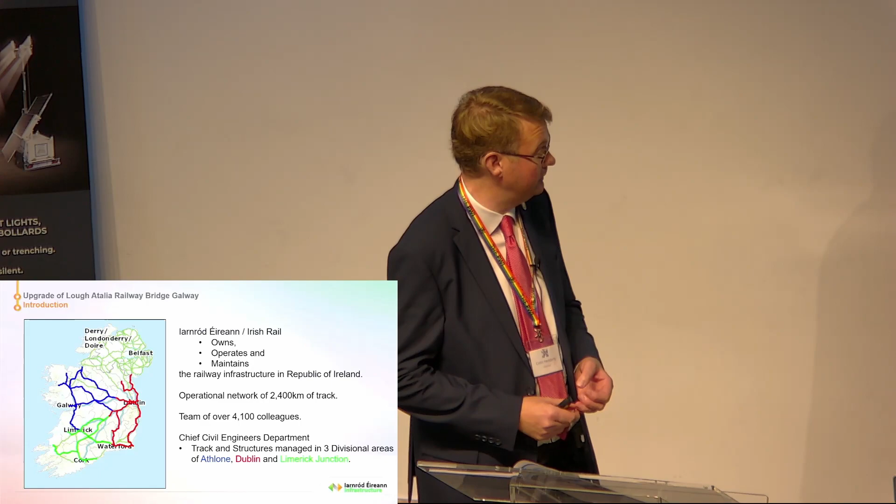I thought I'd just start with defining what I mean by sustainability. So what is sustainability? It's recognition that there are limits to the Earth's natural resources and its ability to withstand ever-increasing human impact. Sustainability is meeting the needs of the present generation without compromising those of future generations, or meeting human needs within ecological constraints. But beware, this is a word that's overused and often abused.

Now, building a sustainable future is a profoundly complex problem. And while there's no oven-ready solutions to these problems, there are better or worse approaches and decisions. And the bridge I'll talk to you about is an example of a better design choice.

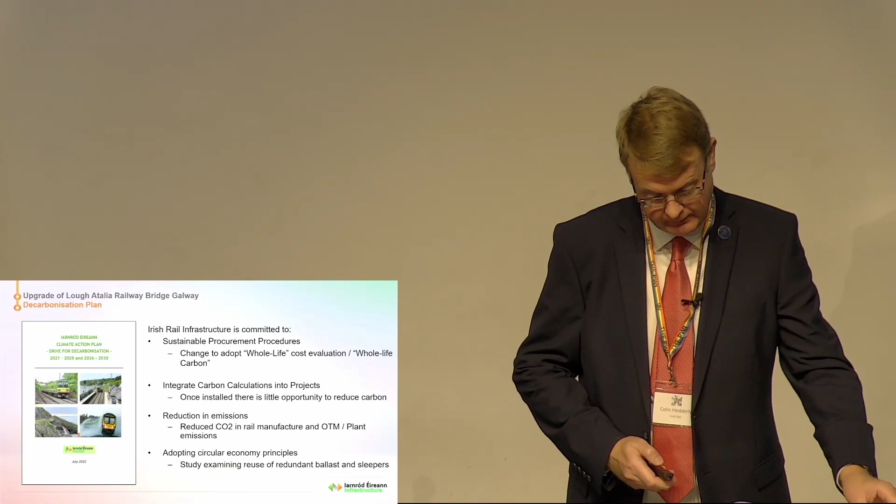We're also committed to adopting circular economy principles. We're examining options there for reuse of redundant ballast and sleepers.

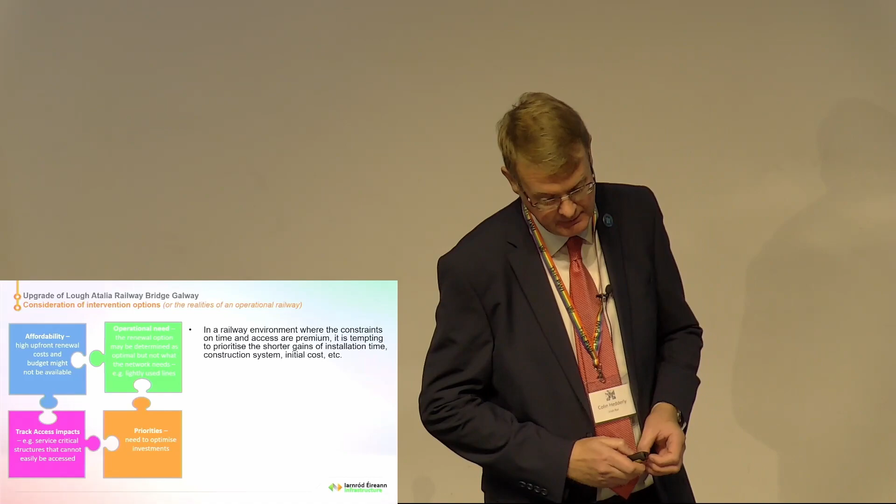Now, when we consider our options for intervention to an asset such as a bridge, in the real world of an operational railway, we have many factors to consider. Here I've highlighted 4: affordability, operational need, track access impacts, and the priorities. So in a railway environment where the constraints on time and access are at a premium, it is tempting to prioritise the shorter gains of installation time, construction system, and initial cost.

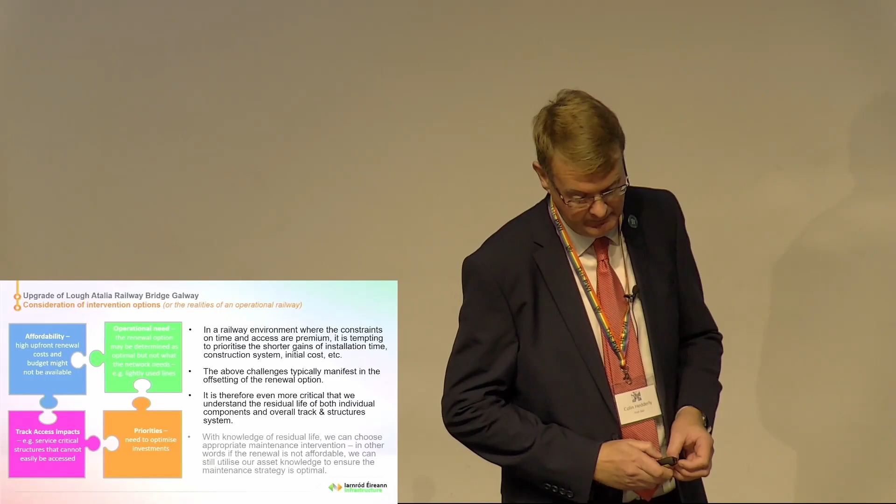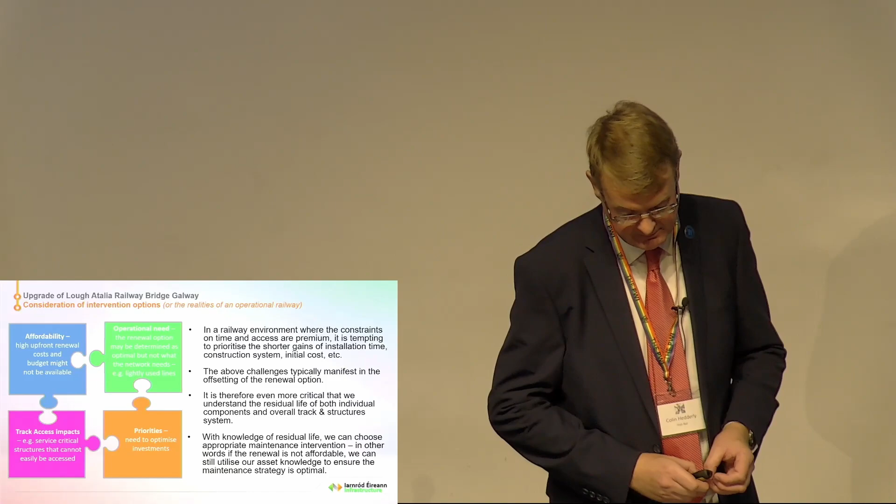And the above challenges typically manifest in the offsetting of the renewal option. It's therefore even more critical that we understand the residual life of both the individual components and overall track and structure system. With knowledge of residual life, we can choose appropriate maintenance interventions. In other words, if renewal is not affordable, we can still utilise our asset knowledge to ensure the maintenance strategy is optimal. So in summary, there are many factors that come into play in making a decision on the intervention option.

Now, after that brief introduction, I'm going to tell you about the project at Lough Atalia Bridge in Galway City. The project involves structural repair and upgrade of a heritage double-track bridge.

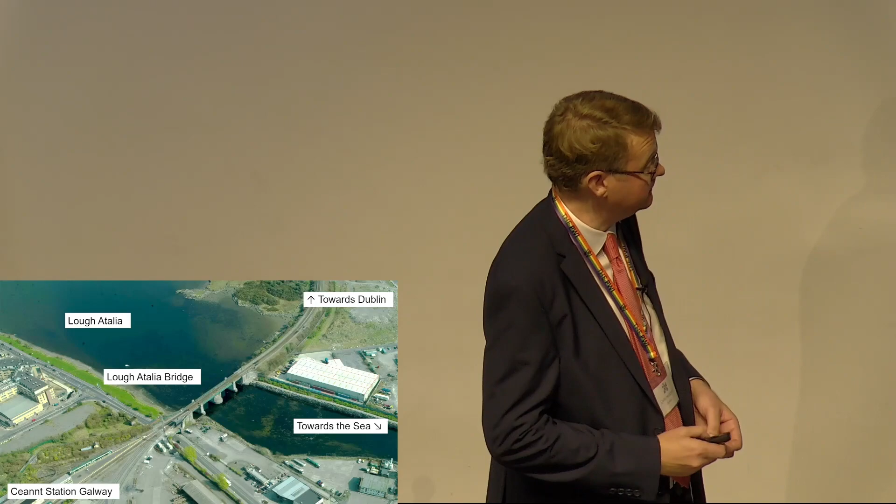Here we see an aerial photo of the bridge across Lough Atalia, which is a sea lough. Trains arriving into Galway sweep around a right-hand curve from the top right with a wonderful vista of the lough, and arrive into Ceannt Station, the terminal station, at the bottom left.

Now, until I started putting together this paper, I hadn't realised the history of the bridge and that it was groundbreaking in its time. I have a slide coming up on that later on. The eagle-eyed of you might have already questioned how come I can only see 4 spans, three piers. I have a slide that explains that now.

The reason being, originally the bridge rotated around an opening span on the central pier. From a structural point of view, we regard that 3rd span as being fully supported above the central pier. So hence the 5 spans.

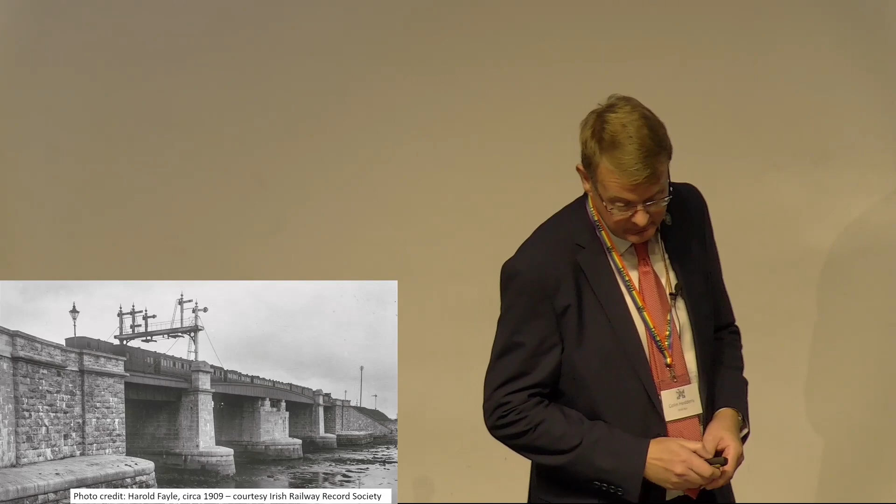The original swivel span of the bridge is recorded as being groundbreaking in its time, in that it was the longest swivel span in the world when constructed in 1851. The design was a patented box girder supplied by Sir William Fairbairn from his foundry in Manchester. Fairbairn is famous for developing the box girder for the Britannia Bridge, which spanned the Menai Straits on the rail line from Anglesey, North Wales, which opened in 1850, just a year before the Galway opening.

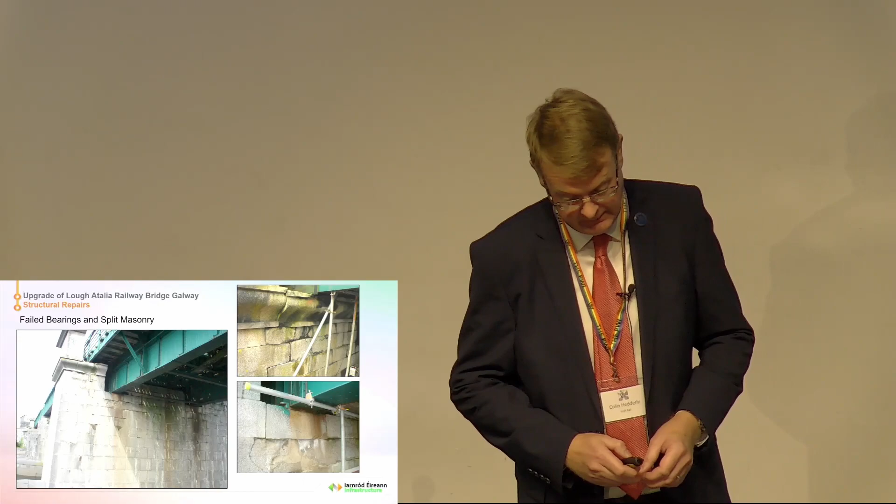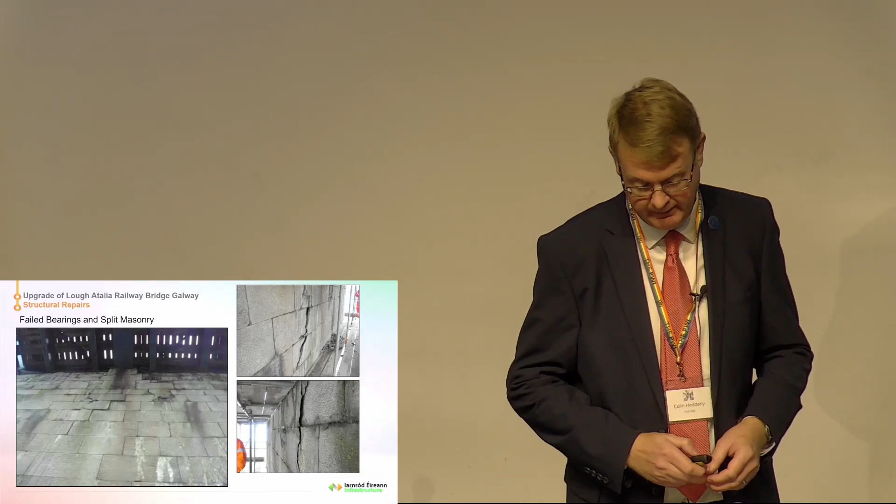The diagnosis was we had problems with the bearings, in that they were no longer working to allow longitudinal movement. Here again, the symptoms of the bearing problem can be seen on the central pier, with cracks running down 8 courses of stonework below the bearing.

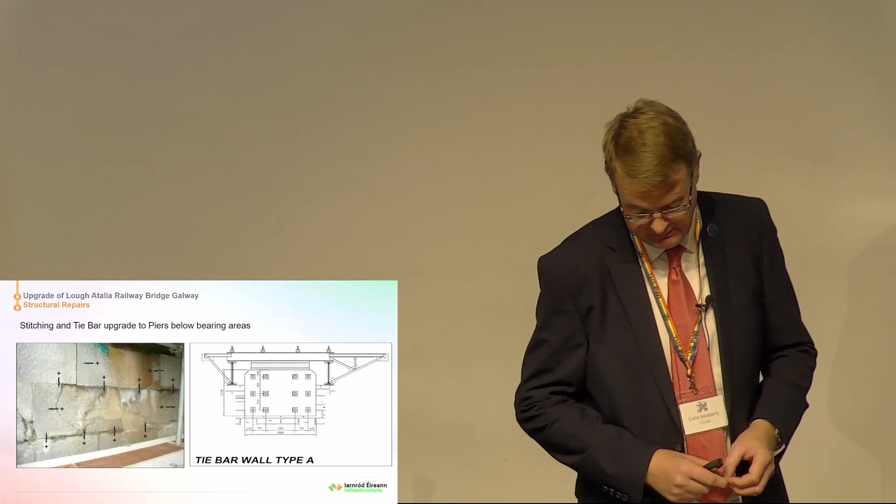Now, Lough Atalia Bridge has already experienced a long life, despite increasing demands being placed on it. With careful stewardship and correct interventions, the bridge can remain in service for many years in the future. And this, as we know, is a more sustainable approach, to prioritise refurbishment over new builds.

In the slide here, our structural department designed a remediation by way of stitching, tie bar enhancement to the areas below the bearings of the piers. The photo on the left indicates the placement of the stitching bars, and the sketch on the right is the tie bar anchors. These tie bars pass right through the pier, anchored in the same fashion on the far side of the pier.

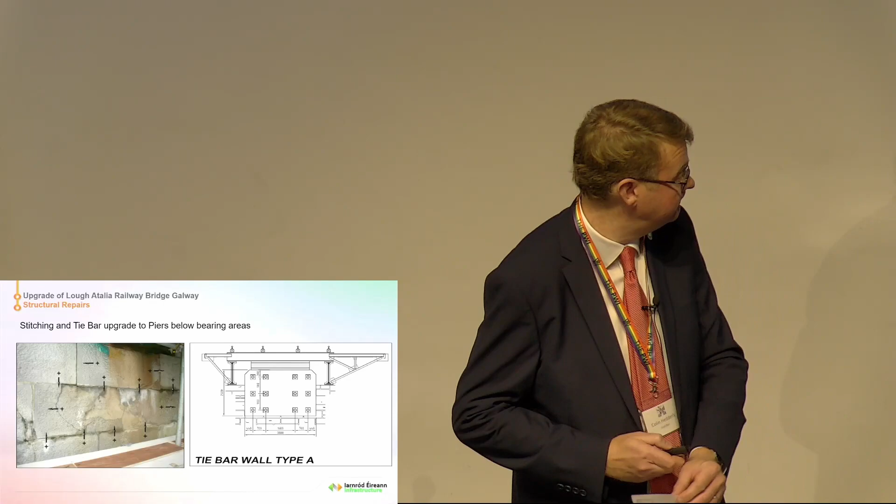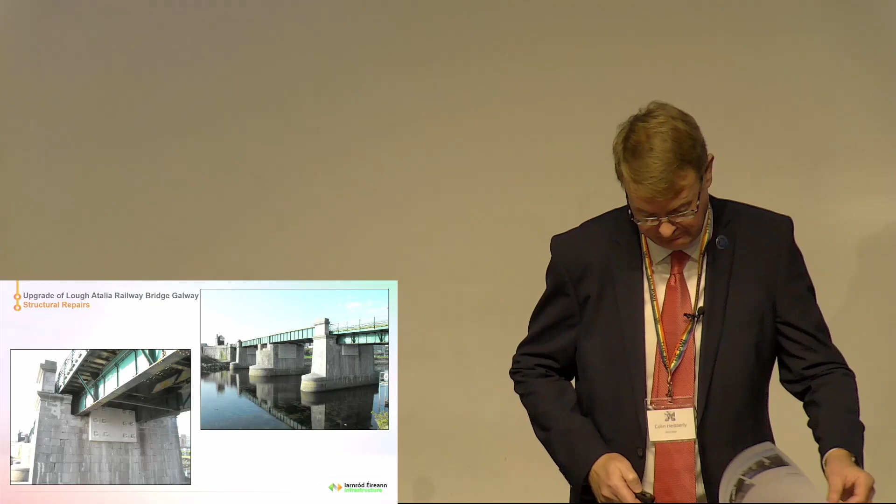We then addressed the failed bearings, and here are photos before and after replacement. We replaced 6 bearings in a 50-hour possession by jacking up the beams and replacing bearing plates. This was done in 2012.

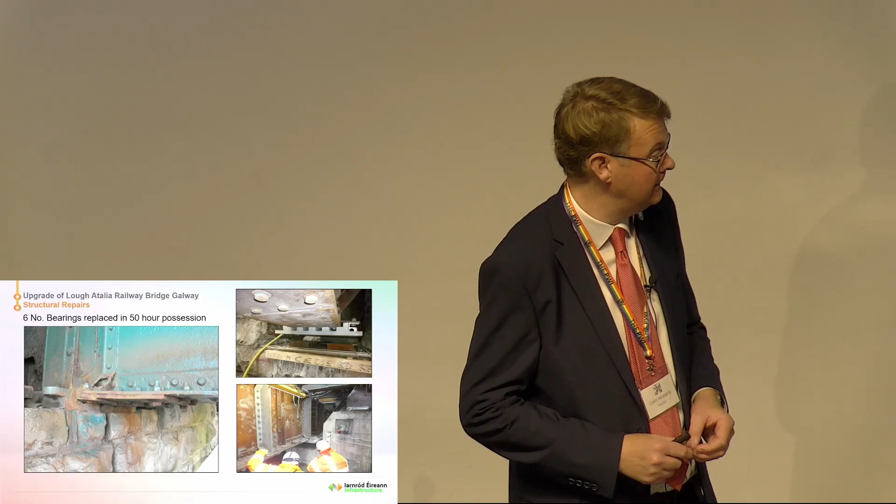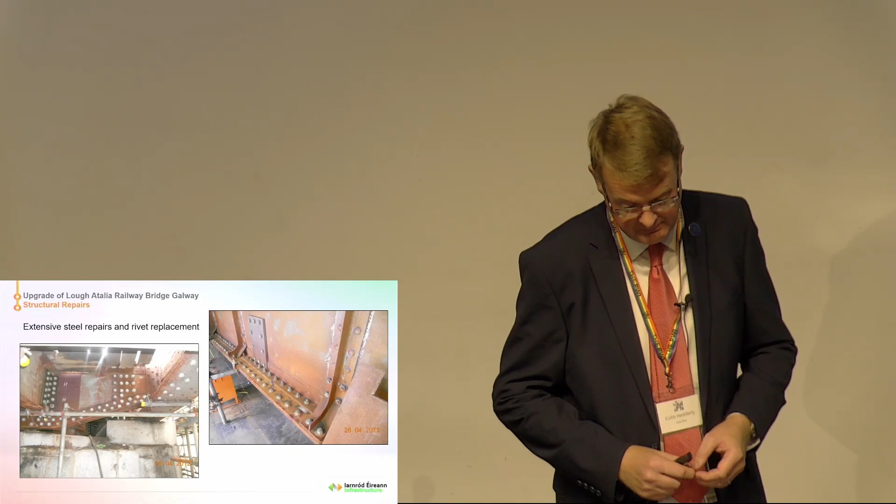Through 2012 and into 2013, our bridge gang went meticulously through the bridge from one end to the other, carrying out extensive repairs. Here's just a sample of the many photos illustrating rivet replacement, plating works, and stiffener repairs prior to painting.

The plan at the time was to complete steel repairs in 2013 and then finish the bridge with track renewal. This didn't happen. The track renewal was deferred in 2013 because the extent of the steel repairs and rivet replacement required exceeded the estimated budget, and the budget assigned to track renewal was diverted to finish the steel repairs.

The lesson here is you really don't know how bad something is until you've had a thorough look. Much of the bridge was difficult to access, so we estimated. When we shot blasted to clean down the metal surface in advance of repairs, it threw up a lot more work than we'd anticipated.

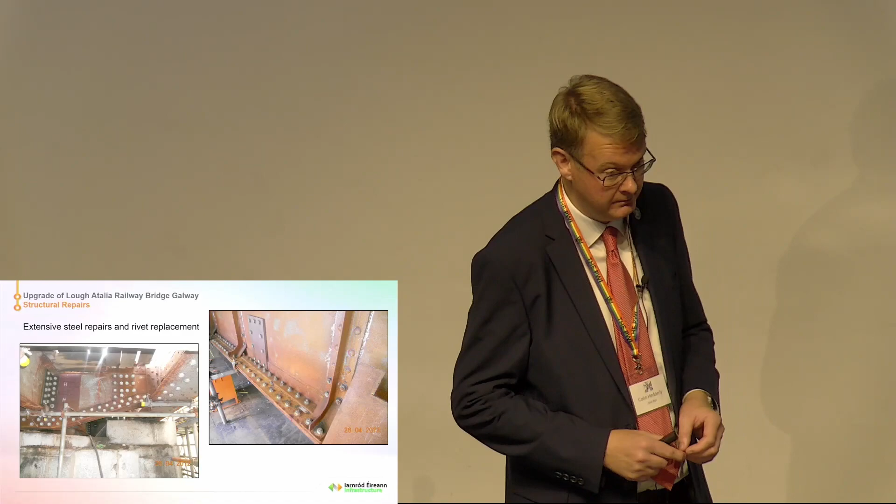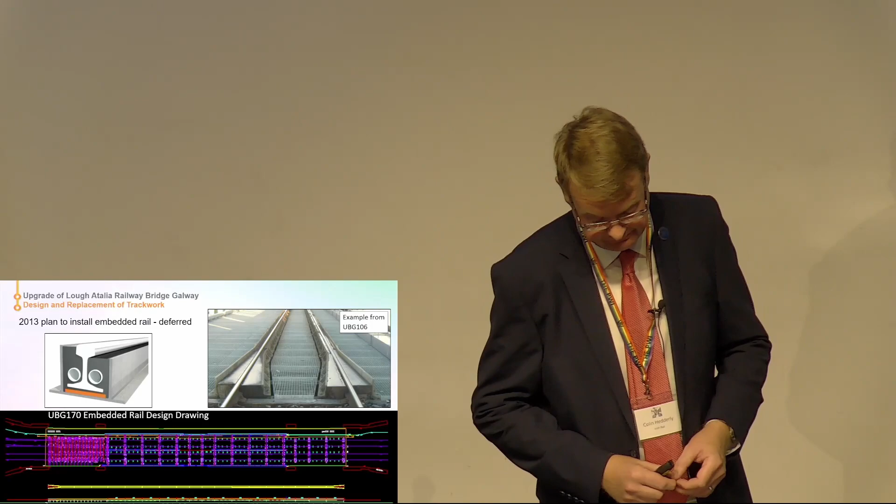Now in 2013, had the track renewal gone ahead, it would have been an embedded rail system like this. We'd have eliminated the timber way-beam for embedded rail. We've used this system widely on bridges across the Irish rail network, and it's considered a standard replacement for timber way-beam bridges, nicknamed silent bridges.

The deferral gave us an opportunity, though, to reconsider the track design. Although it was approved and already designed, at Lough Atalia, shown at the bottom of the slide, the embedded rail system would require extensive and costly conversion of the structure to carry the steel rail holder.

Whilst we might have come to consider embedded rails as a standard solution, there's nothing standard about our heritage bridges. I should add this is no reflection on the embedded rail system—it's a good system in our experience, absolutely. Once it's in place, it's fine; it's just that Lough Atalia needed major alteration works to accommodate the embedded rail.

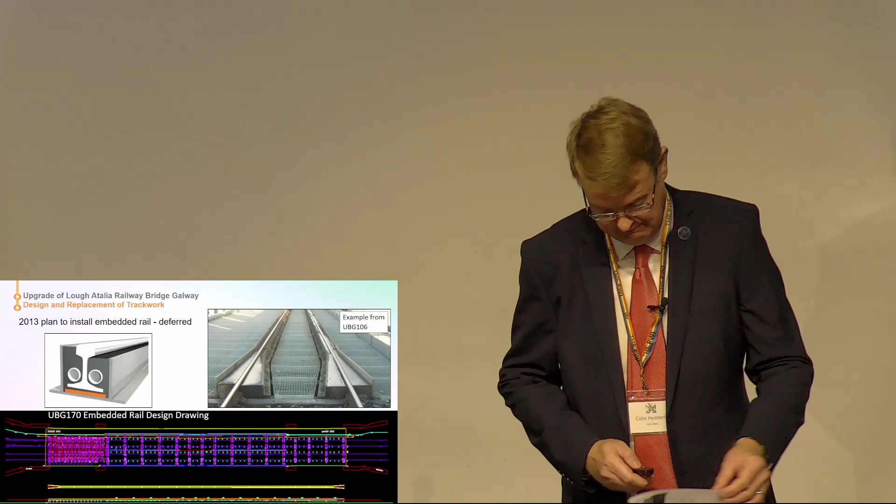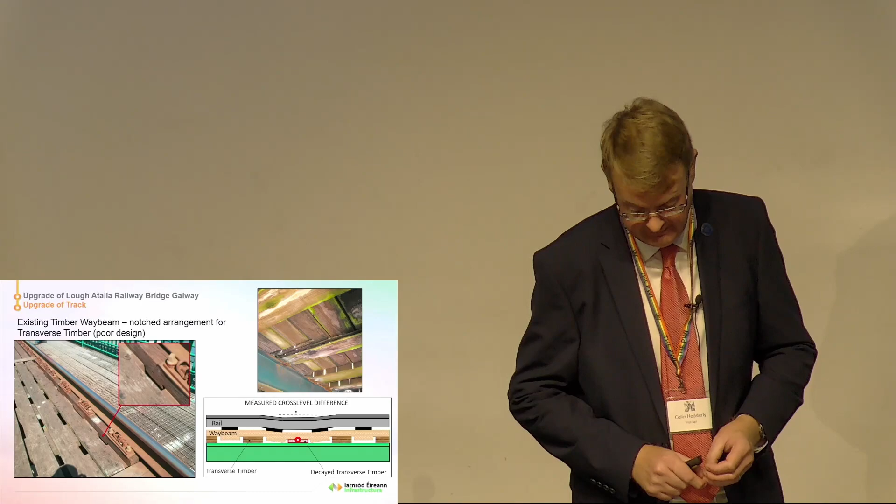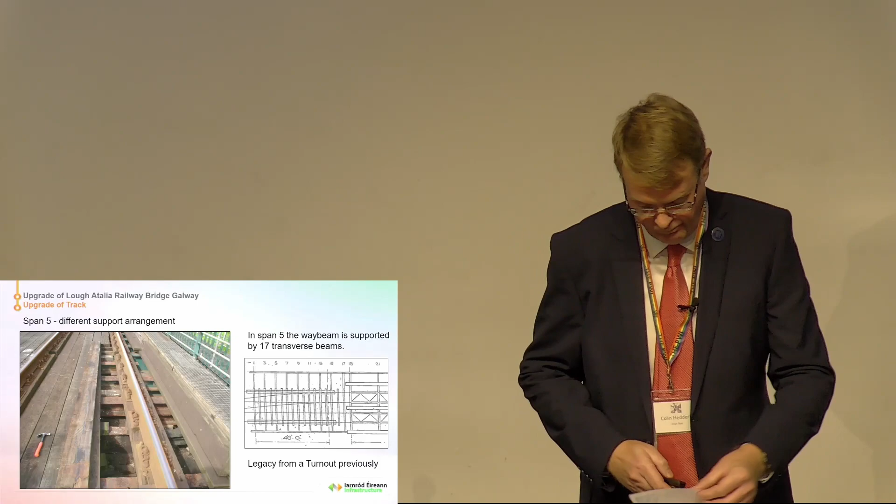The purpose of the condition rating in 2013 was to identify necessary works to keep the track going for around 5 years while we reorganised the track upgrade.

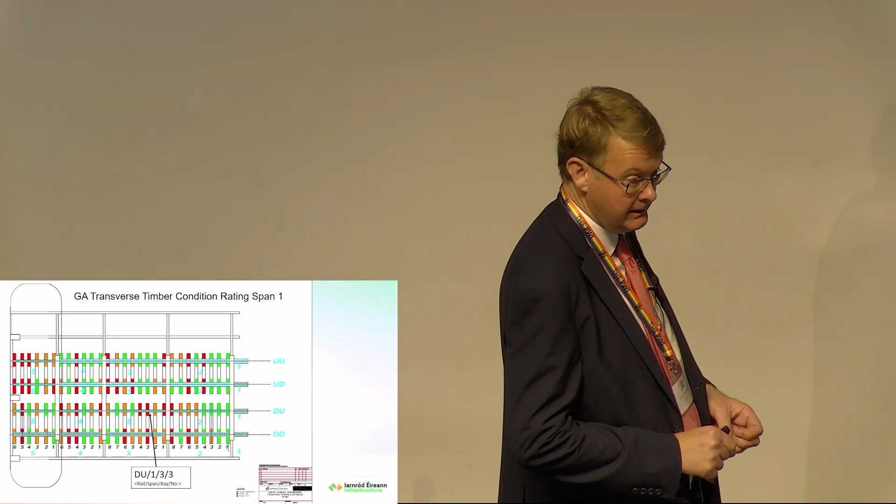A note here about the label in the box, a simple referencing system we devised: D means down track, U is up rail, then a slash, the next number is the span (for example span 1), then the bay within the span (for example third bay within span 1), and finally the number of the transverse timber.

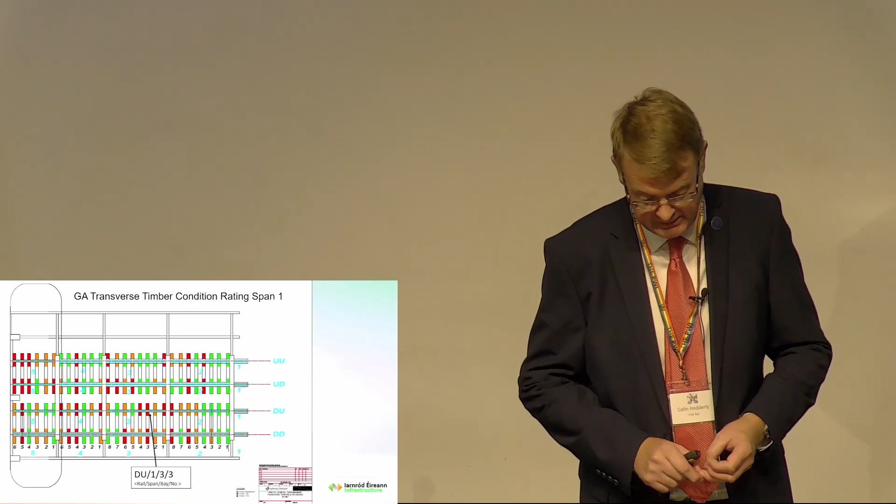We had this referencing system so that all our work could be managed through work orders on our IM system. All red and amber timbers were assigned work orders to be replaced in order to keep the track going. Managing at this level through IMs provided great visibility and tracking of work, giving us assurance about the condition. This was the first time we'd used IMs to drill down to this level of detail in a track system—it proved a great tool, really effective for giving visibility.

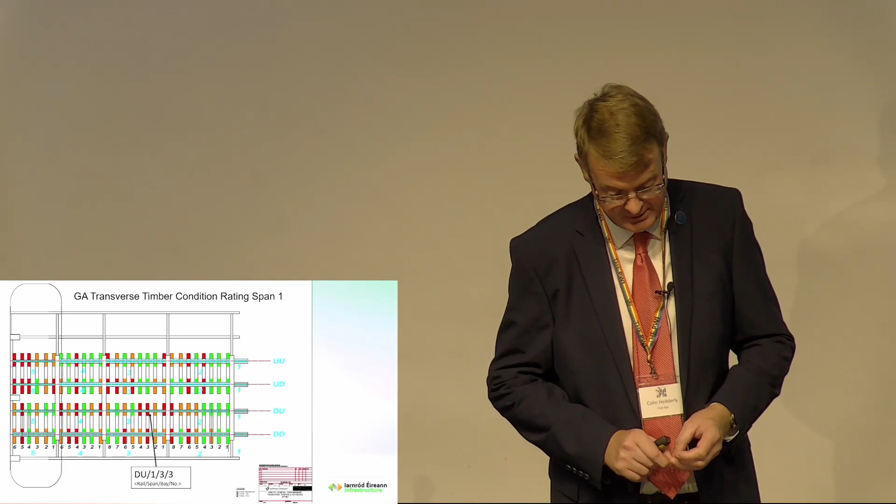Prior to having that referencing system, we didn't have greater detail than just a span level, so for example, we could see some replacement had been done in a span—2 timbers on the down road somewhere in span 1—but no real detail of what and where within the span.

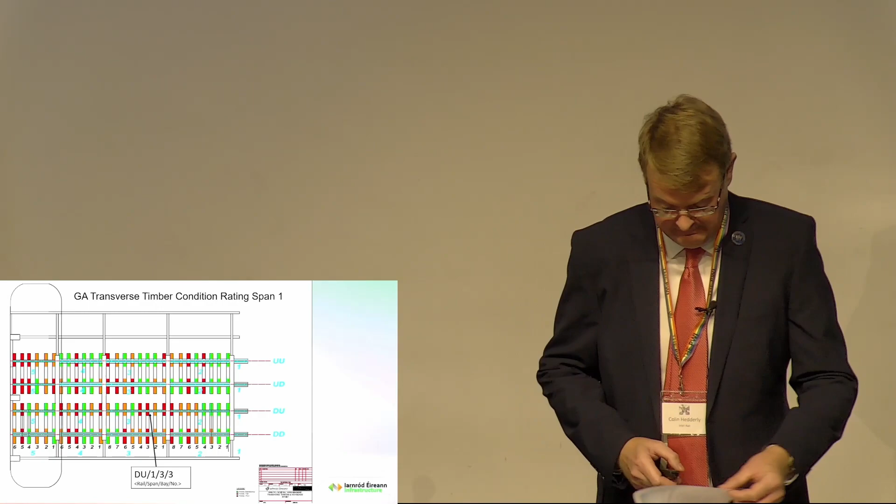Reflecting now on the deferral of the track upgrade, it was an opportunity to rethink the design. It was an opportunity to update my own views and those around me about our standard design approach and towards alternative, more sustainable track design solutions.

If you recall the earlier slide with the puzzle pieces about intervention options, the track access impacts are high for conversion to embedded rail. We were looking at shutting down each track for an estimated 338 days of work. Now some works could run simultaneously, so we'd shorten this a bit, but even a reduction of 20%, 30%, it's not going to change it being high impact.

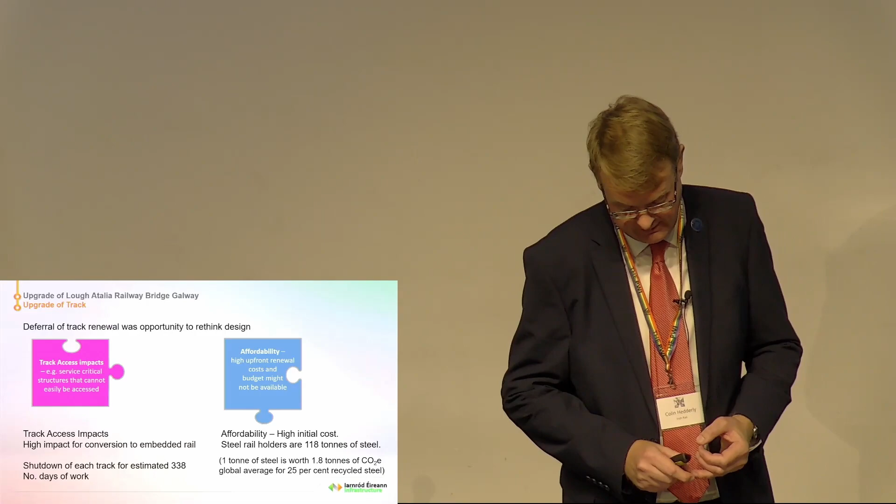On affordability, the embedded rail option is a high initial cost, both monetarily and in embodied carbon. It's hard getting data on CO2 equivalent values for many track materials, but you can find global averages for steel to give an approximation fairly easily. We knew the quantity of steel for the rail holders was 118 tonnes, so we could assess the CO2 equivalent for those, which was in excess of 212 tonnes CO2e. CO2e, the CO2 equivalent, if you're not familiar, is the way of bundling together all the greenhouse gases and expressing them as a single number.

So the challenge in rethinking the track design was, could we do better?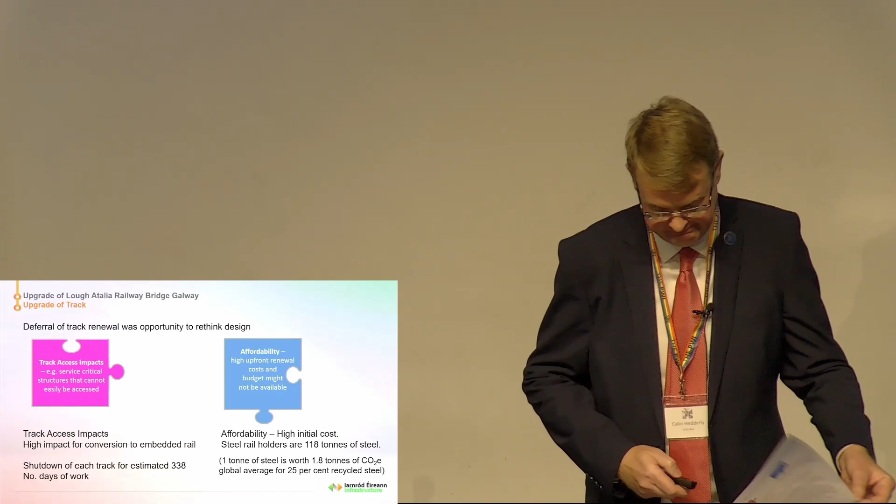In our upgrade, we wanted to provide some enhancement in terms of protection from derailment if we could. The bridge girders prevented a guard outside the rails, so check rail was in our thoughts as a betterment that would help prevent derailment occurring on the bridge. Whilst the arrangement shown had some benefits over the existing arrangement, the drawback was it would require a lot of additional works to achieve the sill clamping down arrangement that would prevent overturning of the waybeam. So again, could we do better?

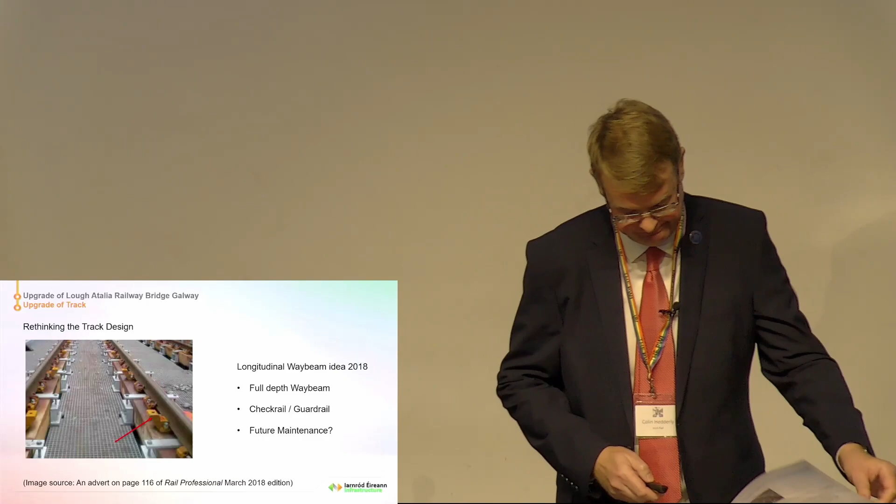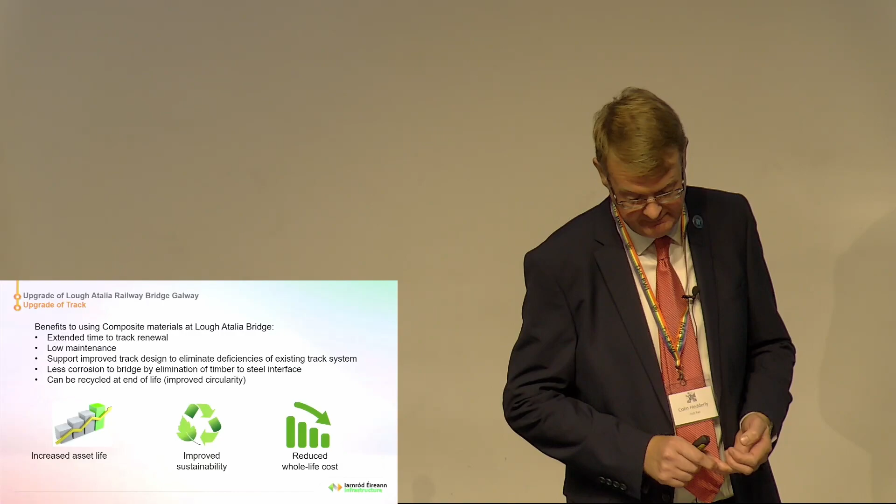We then started thinking about composite materials, and in particular the FFU synthetic timber material. We'd used this for the first time in 2017 to replace like-for-like timber waybeams on a 5-span bridge in Limerick of 135-metre length. Here's some bullet points on the benefits of composite materials, which include increased asset life, improved sustainability, and reduced whole life cost. With our first FFU installation, we certainly found that it required very little maintenance. There had been no screws coming loose, which was a problem in the previous timber waybeams.

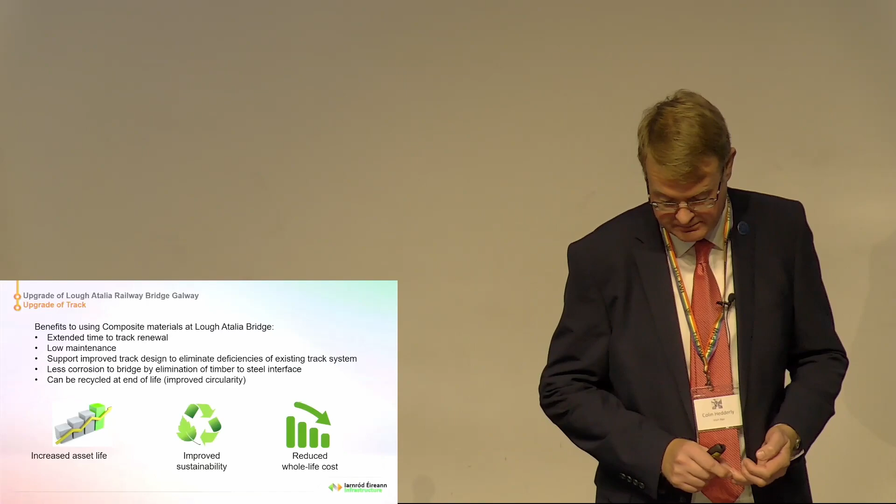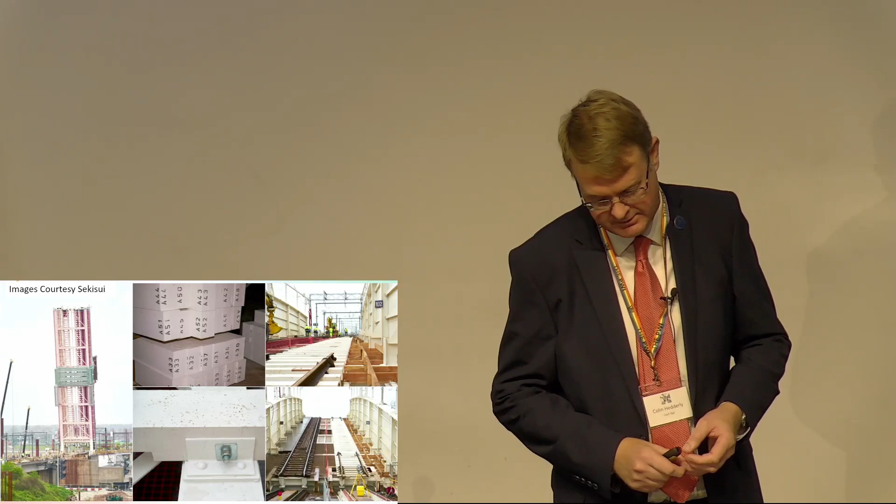So what might be possible with composites, in particular FFU? A good place to start was the manufacturer's website to get inspiration about what you could do with the material. Here's a bridge from the Netherlands where you can see FFUs used as transverse sleepers, showing some detail on the fixing down arrangement, which was of interest. Here again is another example, FFU transverse sleepers on a bascule bridge in Belgium. The fixing down arrangement is shown again. This all helped stimulate and develop ideas about how FFU might be a good option.

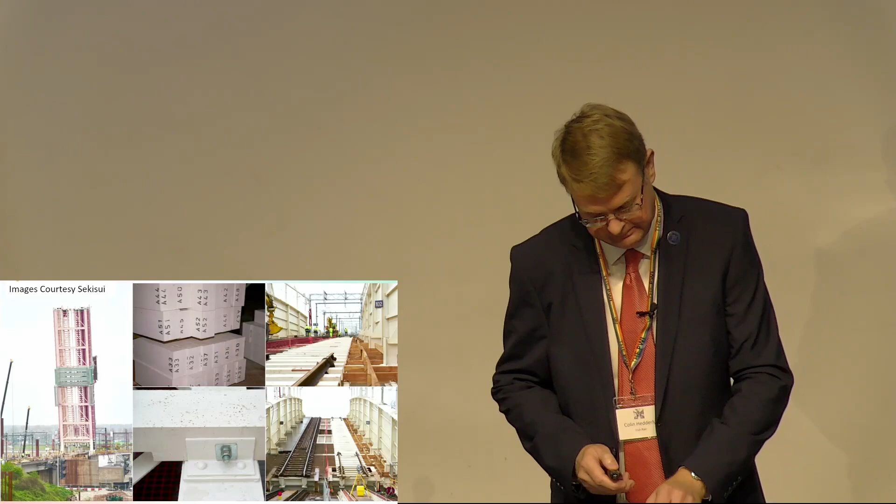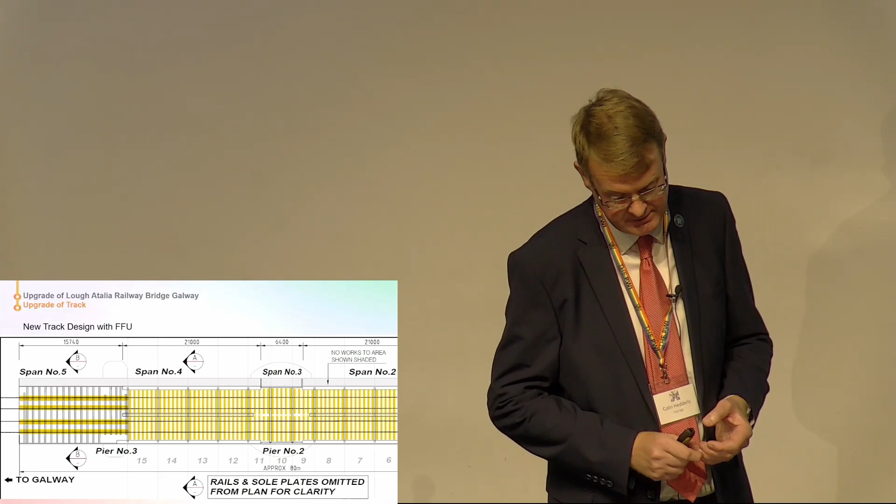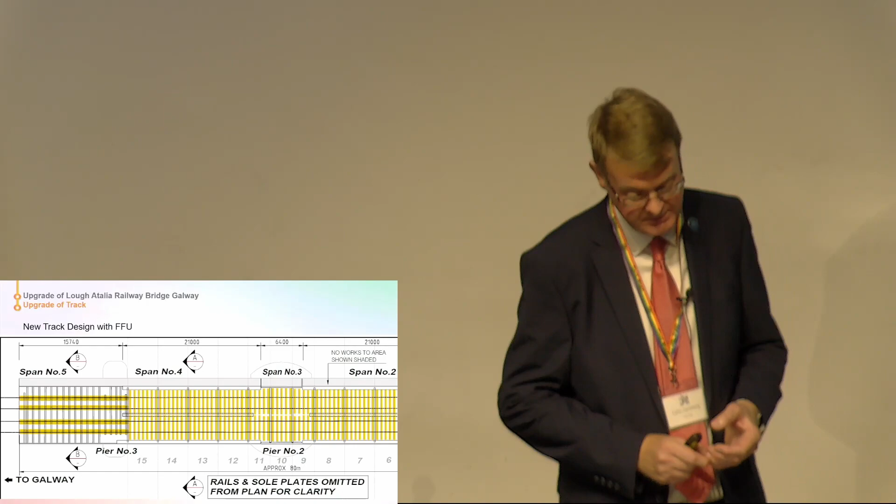In terms of sustainability, the primary benefits of choosing FFU are the long service life, low maintenance, less corrosion to the bridge by elimination of timber-to-steel interfaces, and the use of FFU material enabled us to do things to improve the design we couldn't do in timber, such as extending the sleepers to carry the walkway mesh.

The installation work was all done at night in non-disruptive possessions, and the track returned for normal running of trains in the daytime. This is good for our customers, not having shutdowns.

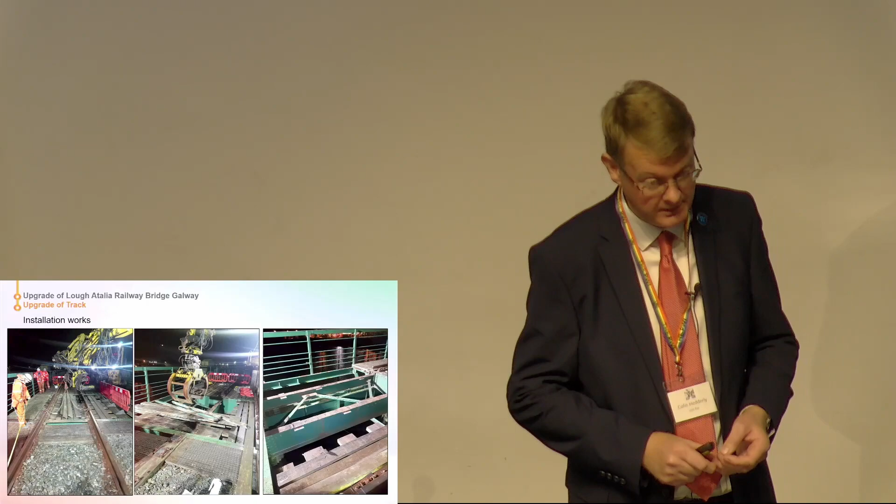This sequence of pictures from left to right shows the lifting of the timber track system. First the rails and webbings are removed on the left, then in the middle the transverse timbers are removed, and on the right we see the exposed rail bearer and girders of the structure.

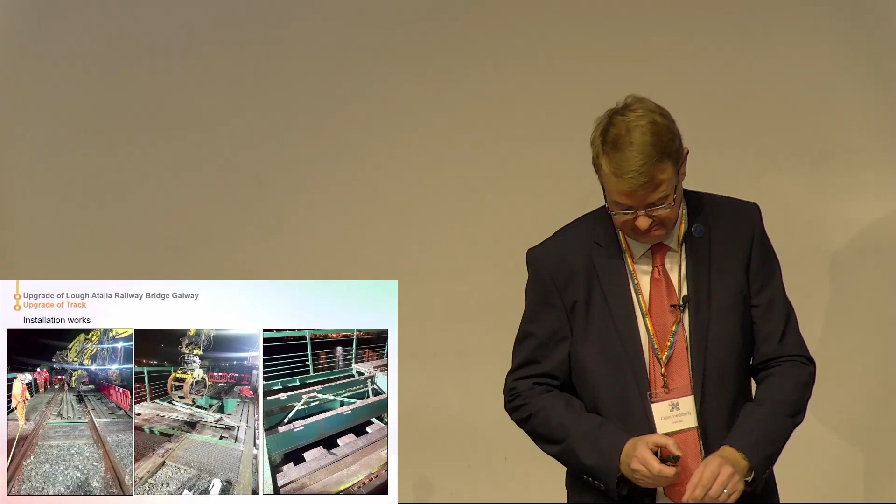We shimmed up during the installation so that we can make adjustments at the end by removing shims to achieve the final rail levels.

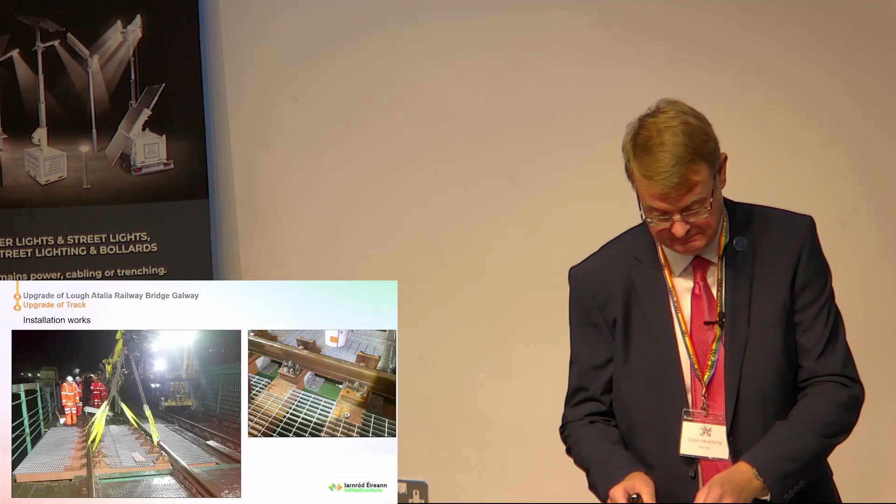And here progress is evident. The left-hand picture shows the downside track upgraded with FFU, whilst the upside is still timber webbing. And the picture on the right shows the extended FFU sleepers carrying the walkway grating.

Now these are cantilevered, they're not touching the structure, and on the left of that picture you can see some rust patches where the old timber used to bear, which was the issue of this interface between the timber and the steel structure. The benefit here is it keeps the air circulating, eliminating possible moisture traps on the bridge structure.

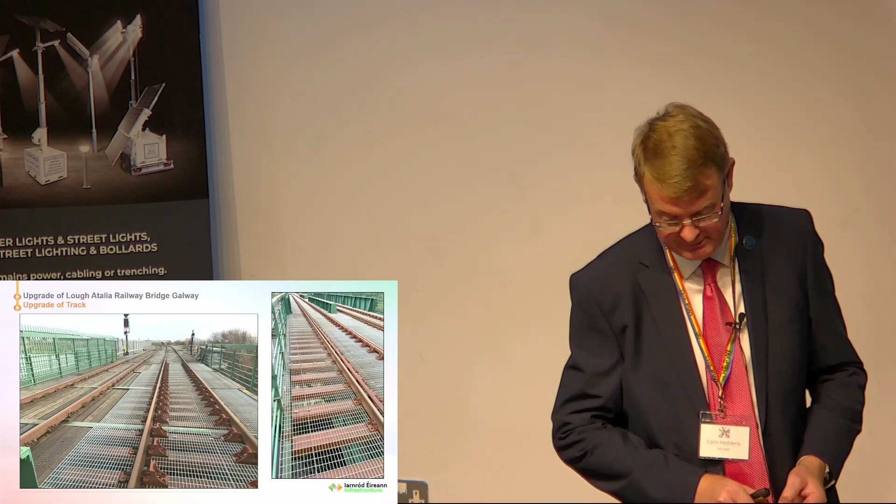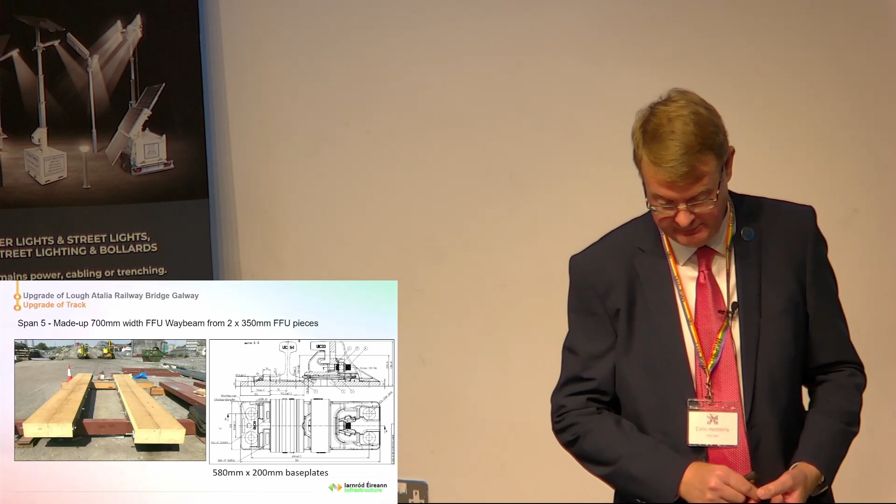For span 5, we created an FFU longitudinal way beam of 700 millimeter width by bolting together two 350 millimeter FFU pieces. The same 3-heg base plates were used on this way beam as on the sleepers.

So the base plate was a 580 millimeter base plate to accommodate that in the 700 millimeter width way beam.

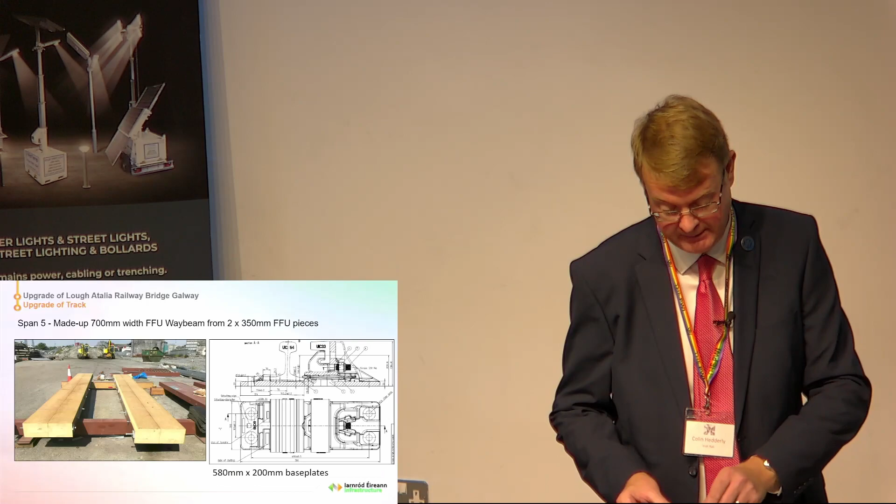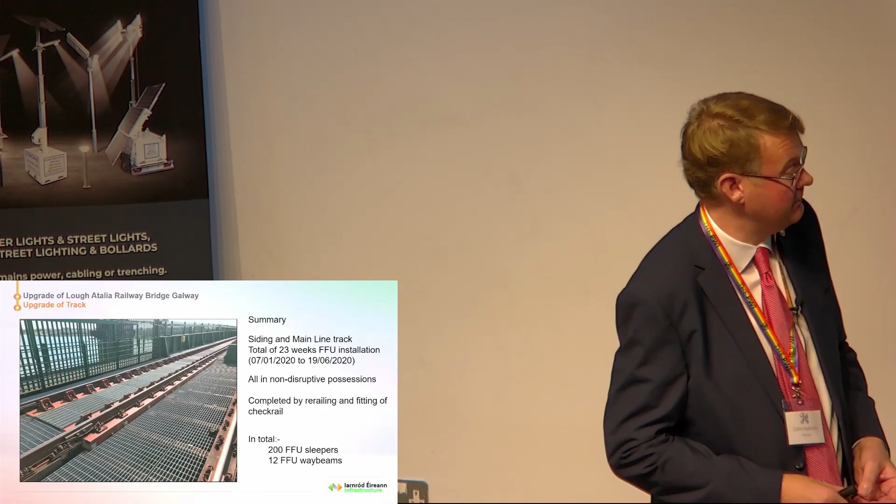So in summary, for the siding and mainline track, we had a total of 23 weeks of FFU installation, all in non-disruptive possessions. It was completed by re-railing and fitting the check rail. In total, we have 200 FFU sleepers and 12 FFU way beams.

And here we see completion. The left-hand photo is the view looking from span 5 into span 4, contrasting the way beam with the sleepers. The check rails were fitted in 2020 to complete the works.

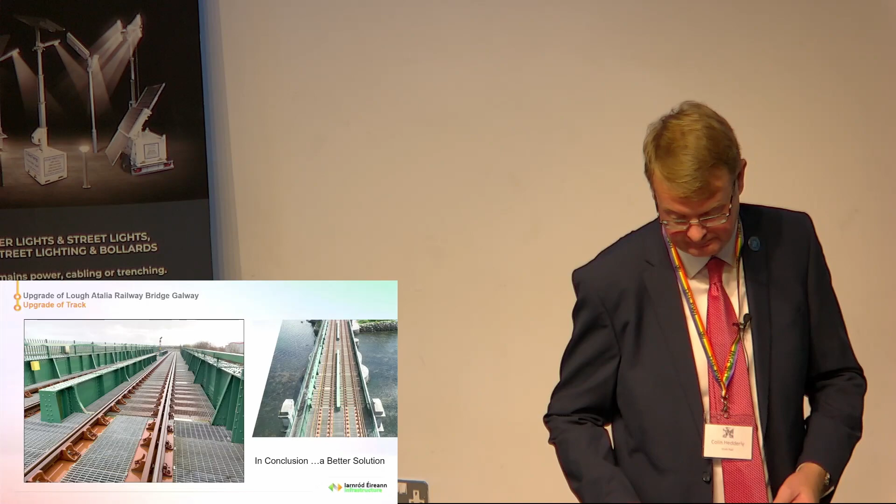And this is before and after photos of the track work.

So in conclusion, with the deferral of the 2013 track renewal, what seemed a setback at the time was turned into a positive outcome through focused rethinking of the track design for sustainability and by the use of new composite materials. The interventions to repair and upgrade that we've made will all sustain the bridge for many more years of service.

We've increased levels of safety and reliability as we've eliminated timber rot and risk of track twist. We've extended the time to track renewal and eliminated the timber-steel interface, which will reduce corrosion to the bridge structure. We've introduced low maintenance composite materials that can be recycled at the end of life, and also delivered a benefit of speed improvement across the bridge for our customers.